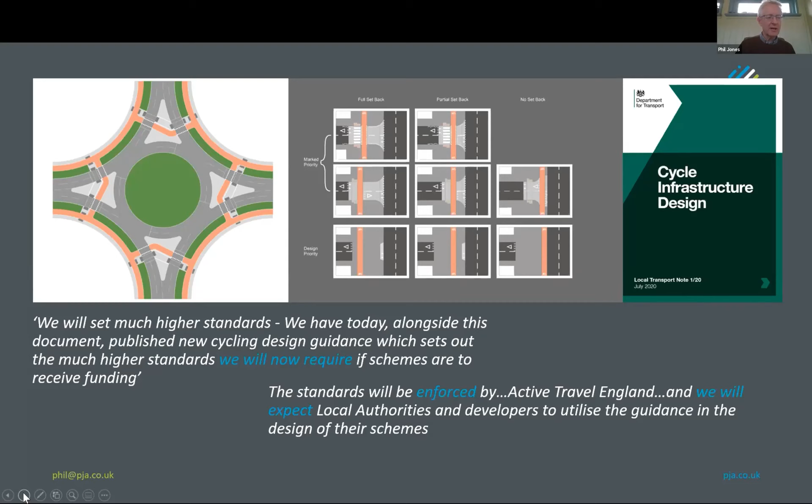We have today produced new cycling design guidance, which sets out the highest standards we will now require if schemes are to receive funding. And again, puts the strength on this with Active Travel England. These standards will be enforced by Active Travel England, and we will expect local authorities and developers to utilise the guidance. So this, I think, for the first time, government is putting significant weight behind a document that is published, and really saying to local authorities, we expect you to use this, and we will check whether you are using it.

Gear Change summarises some of the key things that it's looking for, and a lot of this is written with London experience, obviously, but it is now saying this applies in the whole of England. And we can see from London that physically segregated bike tracks on main roads are the most important thing we can do to promote cycle use. So where these high quality protected schemes have gone in, we see a much broader range of people, a big increase in the number of people taking up cycling because it feels so much more comfortable.

It also talks about creating streets where there are low volumes of motor traffic, so that it is made more conducive to cycling. And we've seen a lot of that recently with the changes during the pandemic, the so-called low traffic neighbourhoods. And Gear Change talks about creating a community right to close side streets and create these low traffic neighbourhoods, with groups of residential side streets able to petition local authorities.

Now, obviously, local people can petition already, so it's quite interesting to see how this will actually be achieved in practice. But the thoughts are quite clear here. This is what Gear Change is really talking about, empowering local people to do that. And it also talks about mini Hollands.

This is a photograph from the Waltham Forest Mini Holland, one of three outer London boroughs that were given significant investment by TfL to promote walking and cycling, to enable it by closing rat runs. And with the success of that, and they have been very successful, government is saying we will choose up to 12 willing non-London local authority areas to benefit from this kind of investment.

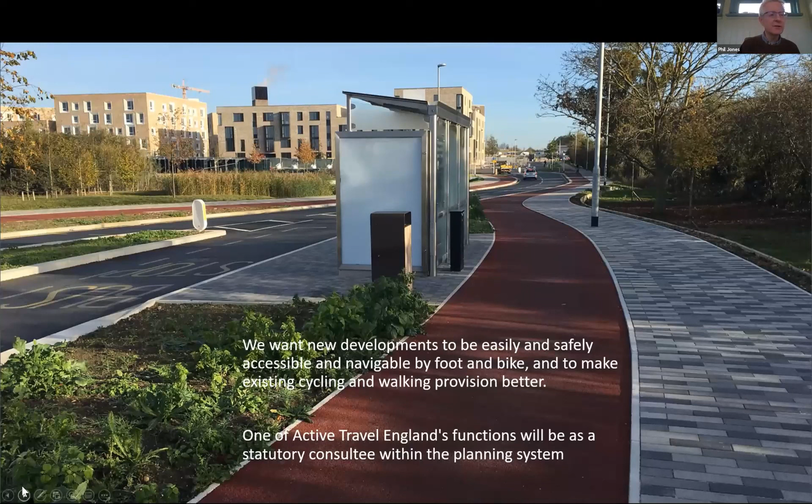Gear Change also has a lot to say about new developments. The government says we want new developments to be easily and safely accessible and navigable by foot and bike, and to make existing cycling and walking provision better. And interestingly, one of the functions of Active Travel England will be a statutory consultee within the planning system. So it will not only be exerting influence on highway authorities, but also on planning authorities. So that's by way of a little bit of background, and hopefully puts LTN 1/20 into context.

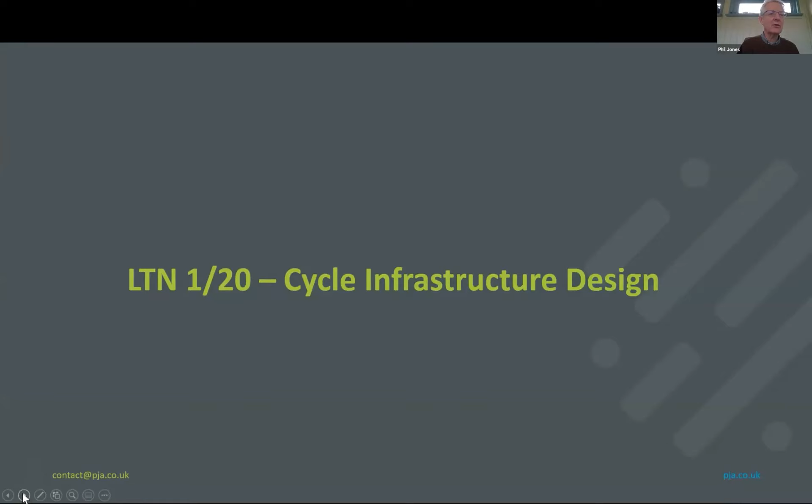So what is it? It's a local transport note. It replaces the former LTN 2/08, which had the same title, Cycle Infrastructure Design, came out in 2008, and really a lot has changed since then. And it also replaces LTN 1/12 on shared use, and I'll say a little bit more about shared use. It applies in England and, interestingly, Northern Ireland. Wales has its own standards, and Scotland is developing new guidance too. So it really applies in the whole of England. And again, in the foreword, he talks about significant increases in cycling, and the quality must sharply improve.

And reiterates the point that's made in Gear Change. It will be a condition of any future government funding for new cycle infrastructure that it's designed in a way that's consistent with LTN 1/20. But furthermore, for government funding for local highways investment where the main element is not cycling or walking, there will be a presumption that schemes must deliver to these standards.

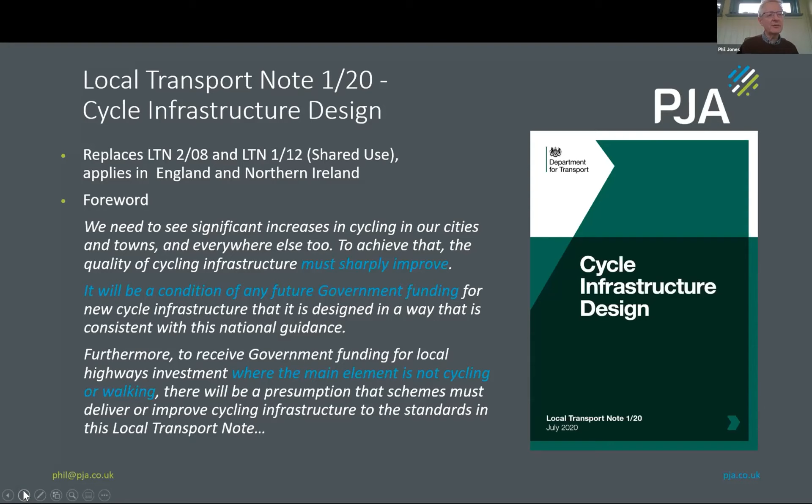And interestingly, even where schemes, developer funded schemes, are not funded by government, still Active Travel England will want to vet the performance of local highway authorities in applying LTN 1/20, and that may affect future funding generally for highway authorities. So Active Travel England is being talked about as wielding quite a big stick. So what's changed from last time?

Really, from LTN 2/08, for the first time, DfT has set out quite clearly what is considered acceptable when it comes to cycle infrastructure. LTN 2/08, those of you familiar with it, had something called a hierarchy of provision, and what that meant was that it really was quite sceptical about cycle tracks and creating high quality cycle tracks, the kind of things that we've seen now in many cities, particularly London. And therefore it said that the first thing that should be done is to reduce the speed and volume of motor traffic to make cycling on the carriageway acceptable, and only then would you go down to do other things.

LTN 1/20 doesn't say that. It says actually there are three types of cycle route. We can have mixed traffic on quiet, slow streets if the motor traffic is slow enough, or we can have a motor traffic free route along a canal or through green space, or we can have protected space on main street, and all of those can be good. So it doesn't matter which of those you choose to make up the network depending on local conditions.

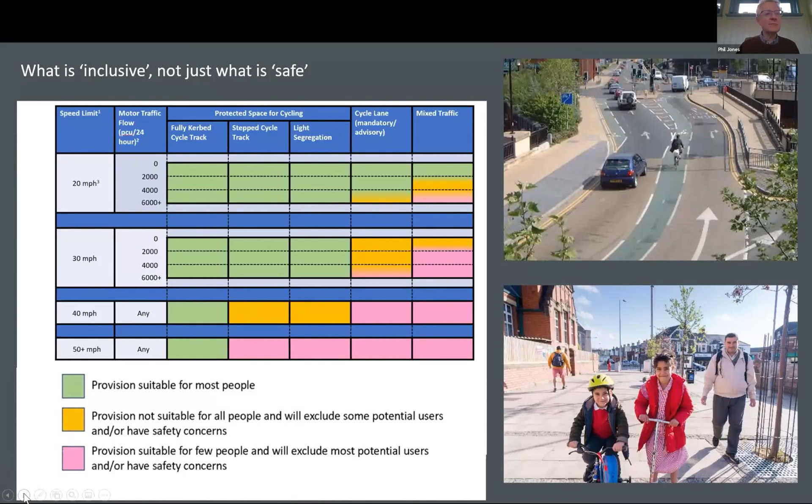So this is saying it's not about what's safe, because the image on the top right could be regarded, for someone who's confident, as a good place to cycle, but it wouldn't attract the people in the bottom photograph to go out there. So if we are going to get a wider range of people, then we have to do better. So those types of condition, this again is Waltham Forest before and after. We can have mixed traffic where we've got low volumes and slow motor traffic, that's fine for cycling. Or we can have routes along green spaces, they can be fine, very attractive.

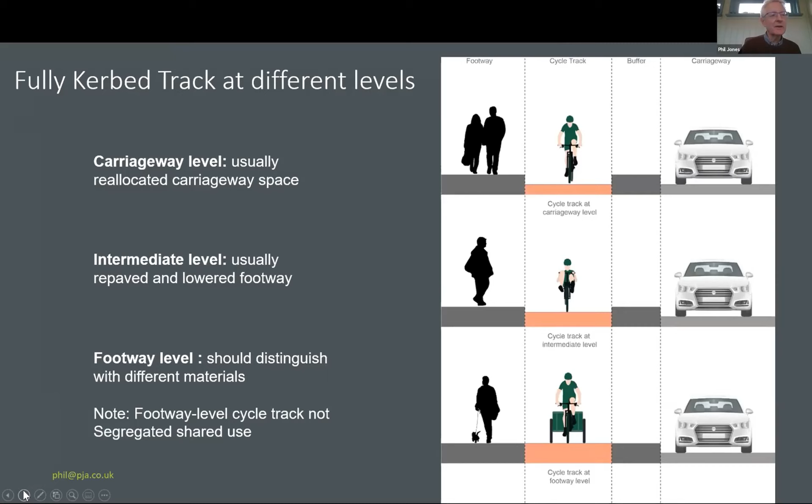And that fully kerbed track, it can be at different levels. It can be at the carriageway level or an intermediate level or at footway level. And the point that we're making here is that if you put cyclists at the footway level, it should be regarded as a cycle track, not shared use. So shared use is now reserved for just where we have no distinction at all between the pedestrian space and the cycle space. And so a white line is not good enough to be a cycle track. A cycle track at footway level should be in different material and separated by something raised and physical rather than just a white line.

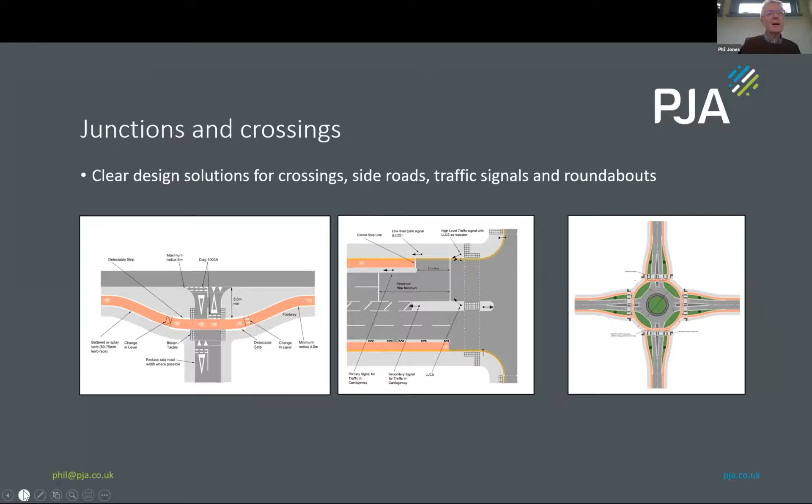So as I said, junctions and crossings, we now see much more detail in terms of the document as to what is acceptable when it comes to junctions. And so some examples. This is the kind of thing that you might see. This is actually in North Fringe of Bristol. We should be separating out cyclists and pedestrians. They move at different speeds. So just because we have staggered crossings and we can only get pedestrians across one arm of the junction during the red phase for traffic, cycles go much faster and so perhaps can go all the way across. So we need to think more creatively about how we handle cycles at signals.

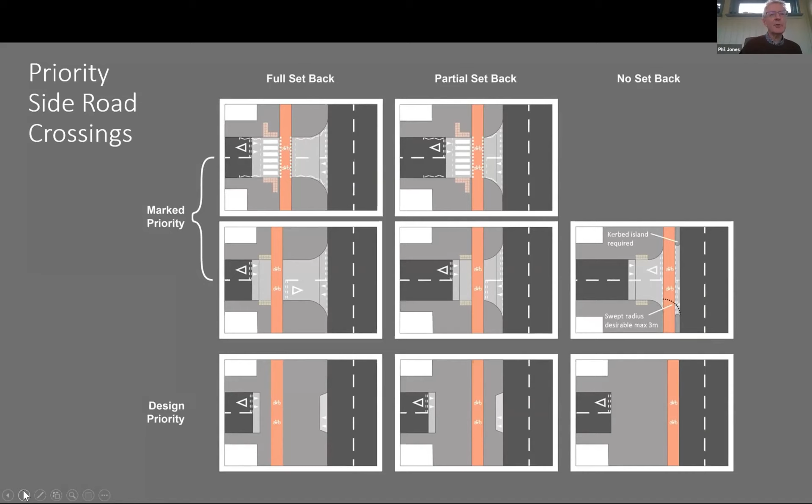We can do things like parallel crossings. This is where we have a zebra plus a cycle track, been legal since 2016, and quite a few places are beginning to put these in now. We should be thinking about priority at side roads. If we're taking cyclists off the carriageway, then if we make them give way at every side road, they won't want to use those off carriageway facilities. So we can use different levels of setback depending on how far the crossing is from the main road. We can mark the priority with a parallel crossing, or just give way lines, or we can use design techniques to show that cyclists have priority, and that's what we should be doing as a norm.

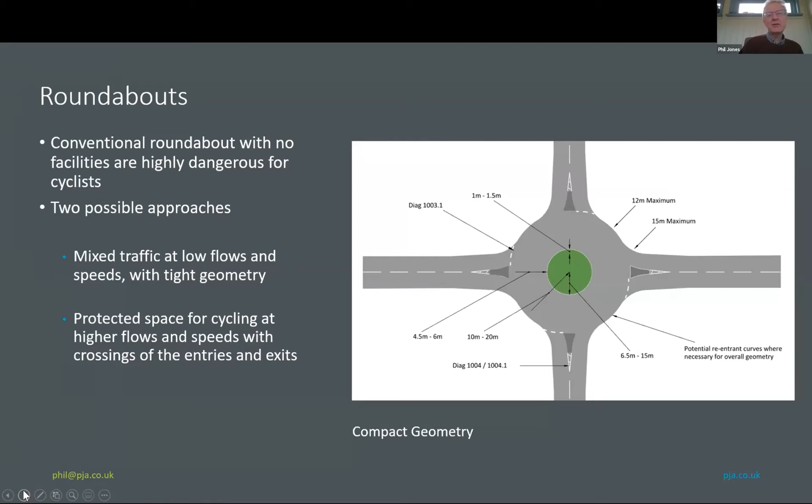When it comes to roundabouts, we can have conventional roundabouts where cyclists are mixing with traffic. They're very dangerous, and that's pointed out within LTN 1/20. So the two approaches, again, like mixed and separated, when it's low flows